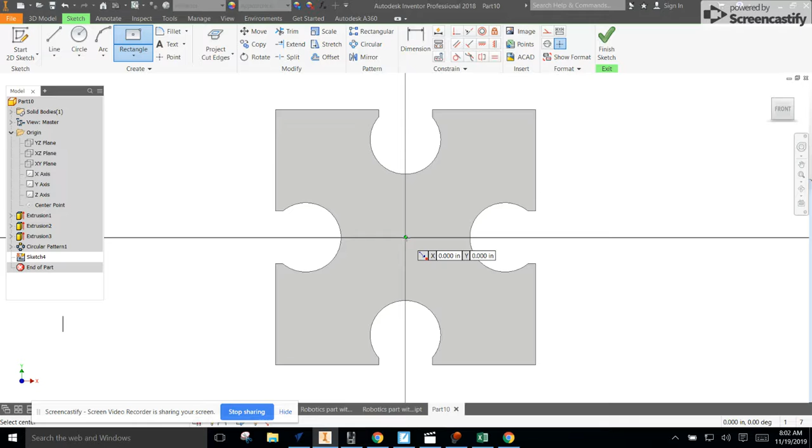I'm going to do 0.114, tab 0.114, enter, finish sketch. And then I'm going to extrude that 0.04.

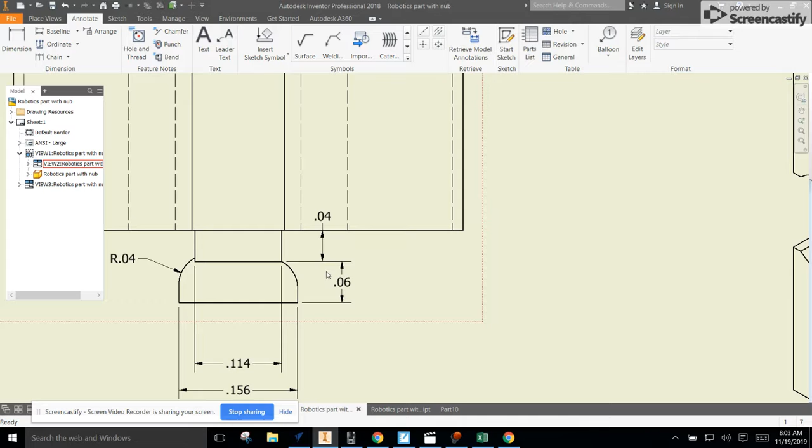Looking at that next piece, it's a little bit bigger. I'm going to do that as well, and I'll show you how to put these radii on here. That's going to be 0.06, and 0.156 is the dimensions of the square. So I'm going to come back to this here, and draw right on that face.

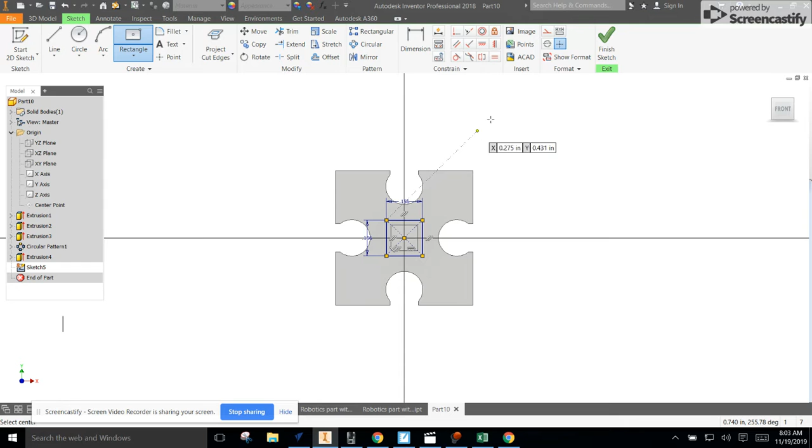0.156, tab 0.156. Double checking, yep, that goes 0.06. So I will extrude, finish the sketch, and extrude that 0.06. Enter. Alright, so almost have it.

The last thing I'm going to do is put this little curvature on here. When I come here and click on that line, it gives me an option. I'm going to shift click... alright, I got that line.

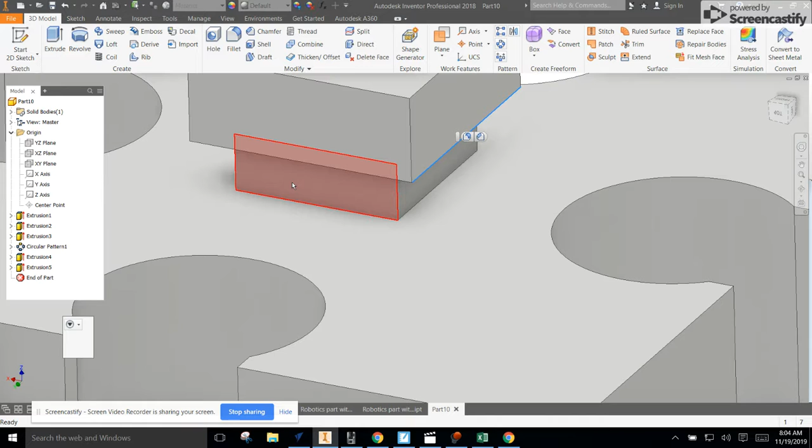I got that line, I'm going to navigate around and do them all at one time. And I'm going to click on that line, and then click this, and I'm going to put in 0.04. And I will hit apply.

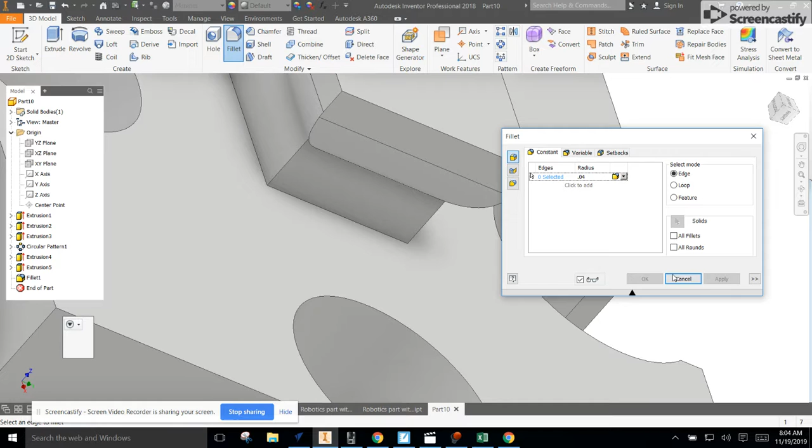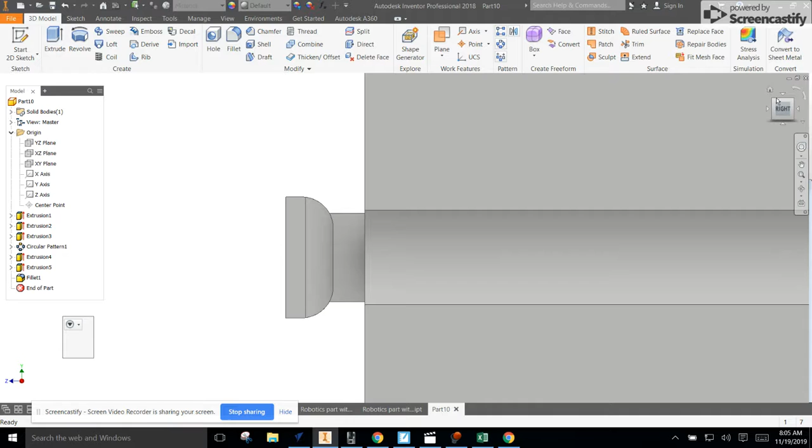And I believe... done all of them. I believe that it has done all of them. Yep, it has. So that is modeling that nub.

I suppose the last thing would just be to put one horizontally through here, although honestly, to check and grade accuracy and modeling skills, this is more than enough. I'd be very pleased if this were turned in. I would consider this 100%. I'd consider it 105% if you also had that one more extruded hole going through there.